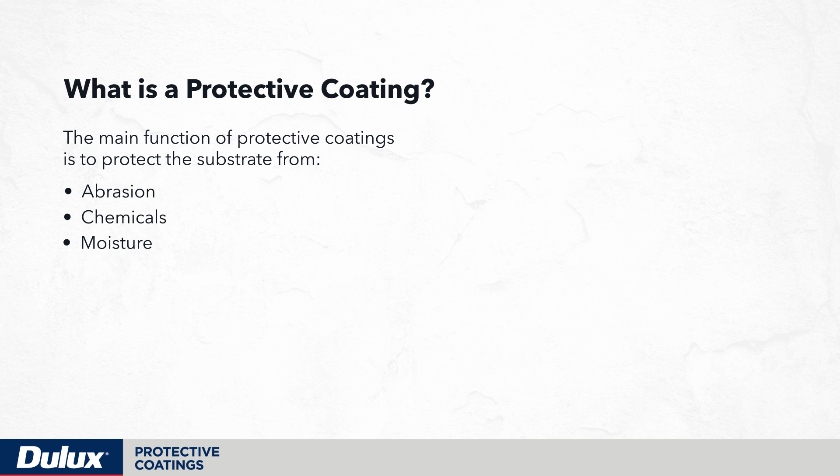The main function of protective coatings is to protect the substrate from abrasion, chemicals, moisture, and other contaminants within the environment. Their high performance characteristics provide long-term durability and protection of a substrate such as mild steel, galvanized surfaces, and concrete surfaces.

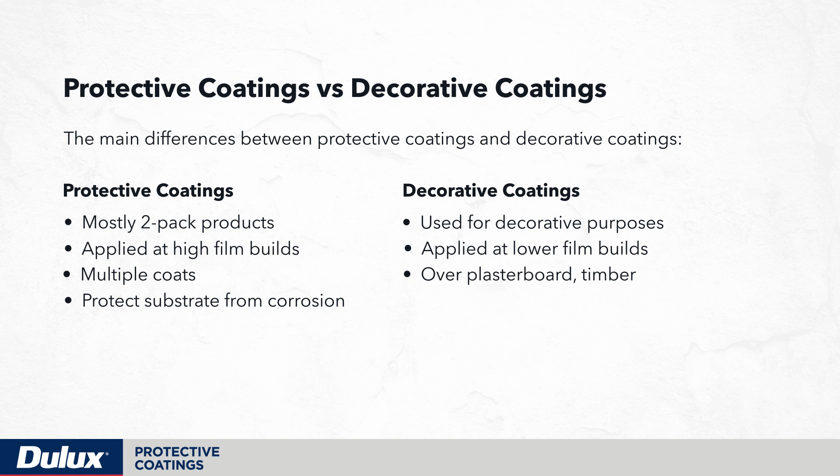The main differences between protective coatings and decorative coatings is that protective coatings are mostly two-pack products applied at higher film builds in multiple coats to protect the substrate from corrosion. Decorative coatings, on the other hand, are mostly used for decorative purposes at a lower film build over plasterboard, timber, and masonry type substrates.

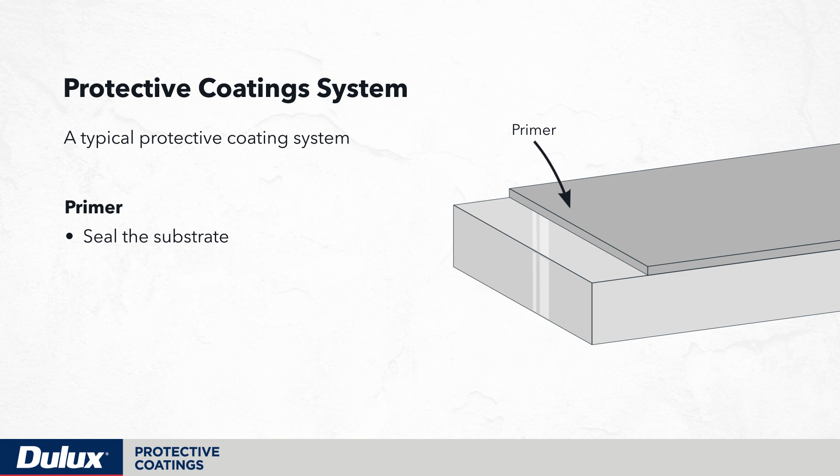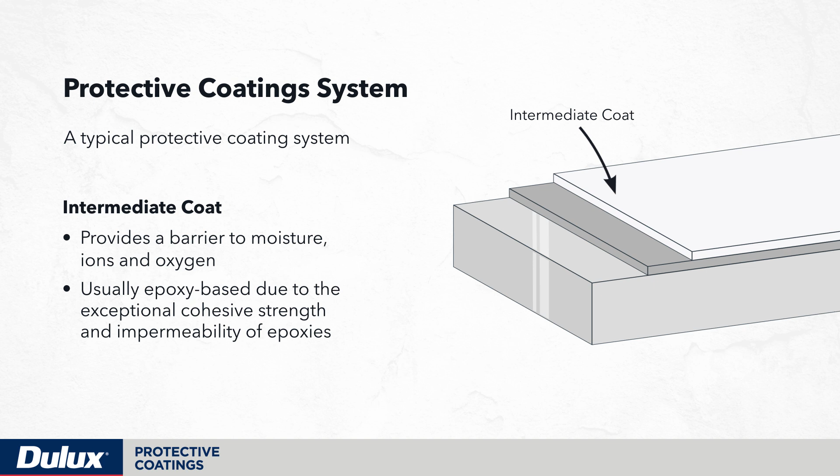A typical protective coating system comprises of a primer, an intermediate, and finish coat. The main function of the primer is to seal the substrate from corrosion and to provide good adhesion for the subsequent coats. The intermediate coat provides a barrier to moisture, ions and oxygen. Usually this coating is epoxy based due to the exceptional cohesive strength and impermeability of epoxies.

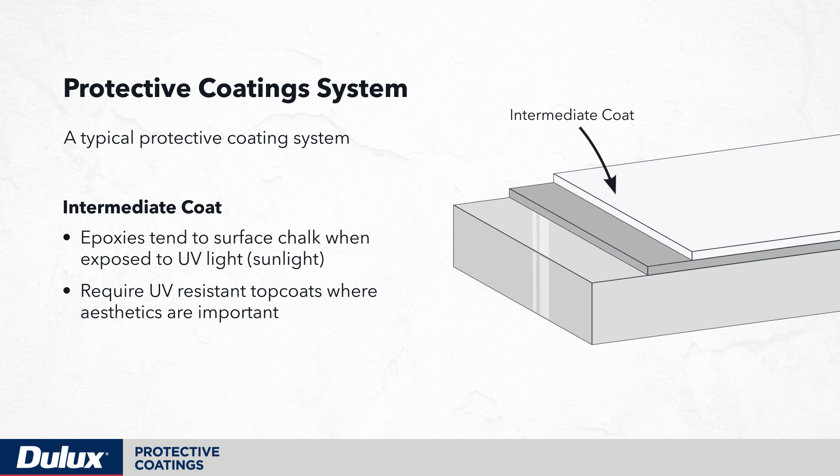Epoxies, however, tend to surface chalk when exposed to UV light, sunlight, and therefore require UV resistant top coats where aesthetics are important. The finish coat has a number of functions including UV resistance, colour and chemical resistance. Top coats can also provide other properties such as graffiti resistance. All of these coatings have an important part to play in the overall protective coating system.

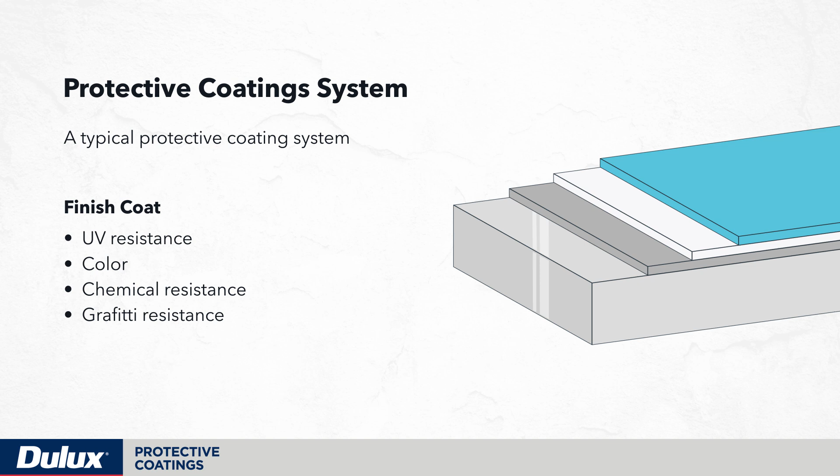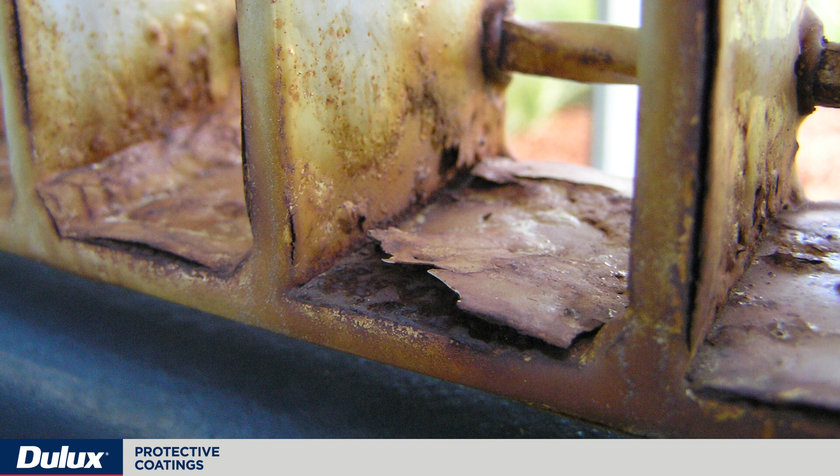The cost of managing corrosion can be massive, and it's important to preserve and maximise the initial investment. Corrosion of steel is an electrochemical reaction that requires the presence of water, oxygen, and ions such as chloride ions, all of which exist in the atmosphere.

Let's discuss the different types of environments and atmospheric categories. Each corrosivity category has a code and a description. The categories range from C1, very low, C2, low, C3, medium, C4, high, C5I, very high industrial, C5M, very high marine, and lastly T, inland tropical. All of these environments and their categories identify what type of corrosivity the environment has and what types of coatings are most suitable for protection of a substrate such as mild steel within that environment.

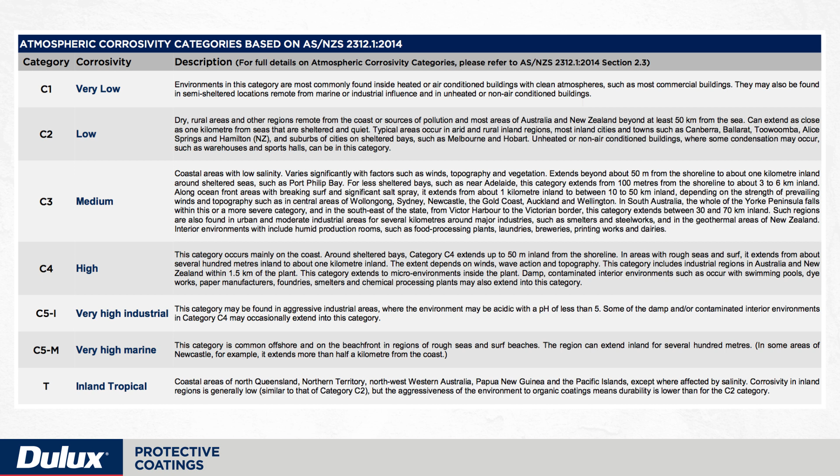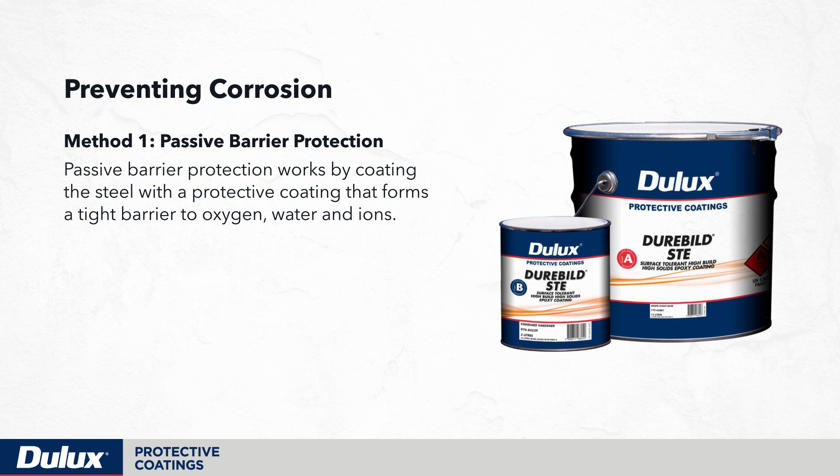How do we stop steel from corroding? There are three methods that may be used to protect steel. 1. Passive barrier protection. Passive barrier protection works by coating the steel with a protective coating that forms a tight barrier to oxygen, water, and ions. The lower the permeability of the coating system to water, the better the protection. Two-pack epoxy coatings and chlorinated rubbers applied at sufficiently high film builds offer the most successful passive barrier protection.

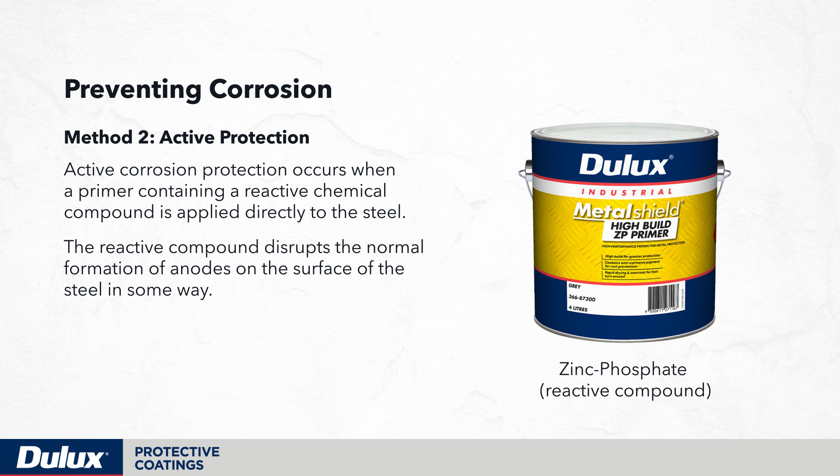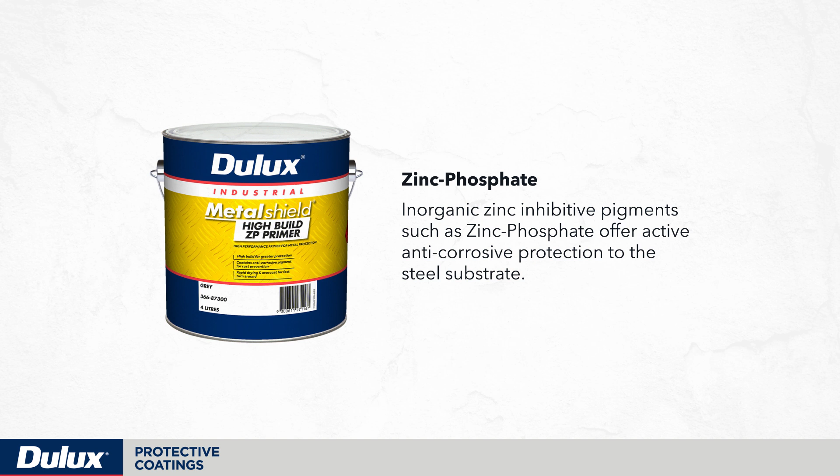2. Active protection. Active corrosion protection occurs when a primer containing a reactive chemical compound is applied directly to the steel. The reactive compound disrupts the normal formation of anodes on the surface of the steel in some way. For example, inorganic zinc inhibitive pigments such as zinc phosphate offer active anti-corrosive protection to the steel substrate.

And 3. Sacrificial protection. If any two dissimilar metals are in contact with each other, the more reactive metal will corrode in preference to the less reactive metal. This is the basis of galvanic sacrificial protection. The most widely used metal for the protection of steel is zinc. Zinc metal in direct contact with the steel substrate offers protection through the preferential oxidization of the zinc metal.

Zinc is a great choice in protecting steel, as not only does it corrode in preference to the steel, the rate of corrosion is generally lower. Examples of coatings using this principle of sacrificial protection include organic zinc-rich primers, hot-dip galvanizing, and electroplating.